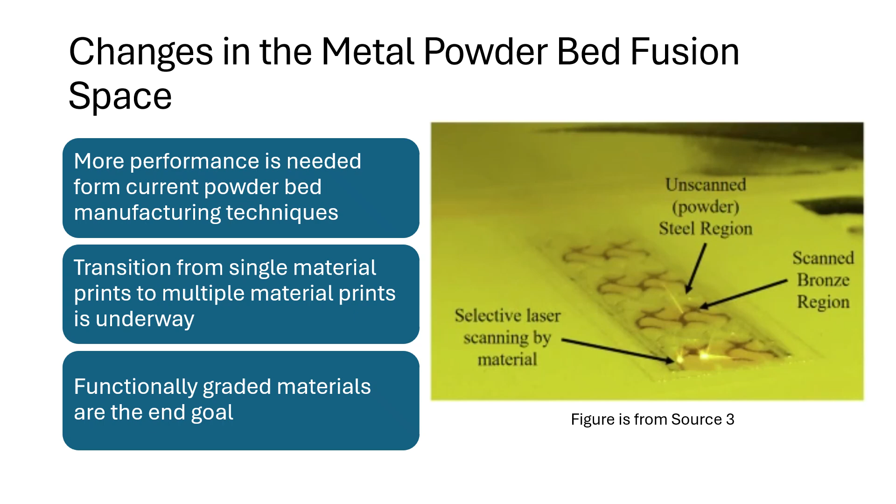The motivation to take on this topic is straightforward. Many aerospace and thermal systems require materials with contradicting properties: high thermal or electrical conductivity in one region and high strength in another. With traditional manufacturing methods, these differences mean that two parts need to be made and then in some way joined. Multi-material powder bed fusion lets us transition between these properties seamlessly. For instance, in a rocket nozzle, we can integrate a copper alloy for heat transfer near the throat and a nickel or steel-based alloy for structural reliability along the outside of the throat area.

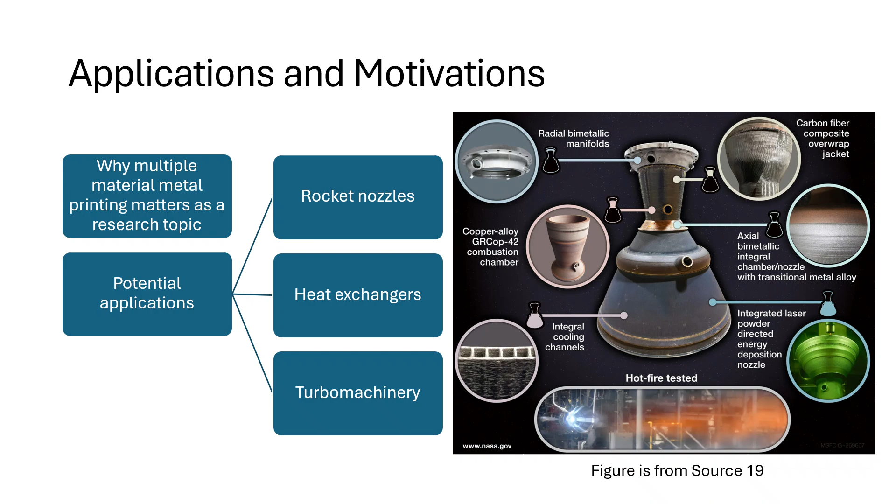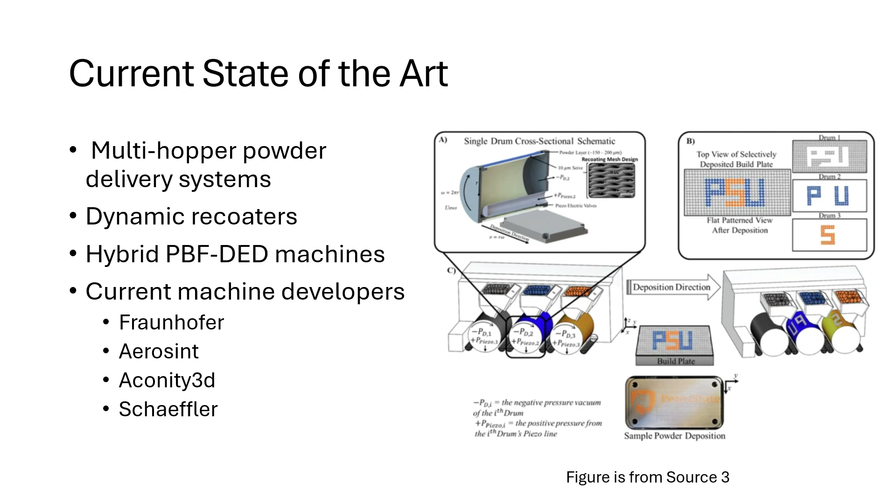The current research focuses heavily on hardware and process control. Fraunhofer, a printer and powder supplier based in Germany, is experimenting with dual hopper real-time recoating systems. Aconity3d is also offering very similar capabilities to Fraunhofer, and hybrid setups are emerging that merge powder bed fusion's precision with directed energy deposition speed, which is ideal for functionally graded transitions. Schaeffler and Aerosint are currently market leaders in this space with a recoater that handles up to 3 different materials. These advances help to move the technology closer to full commercial adoption.

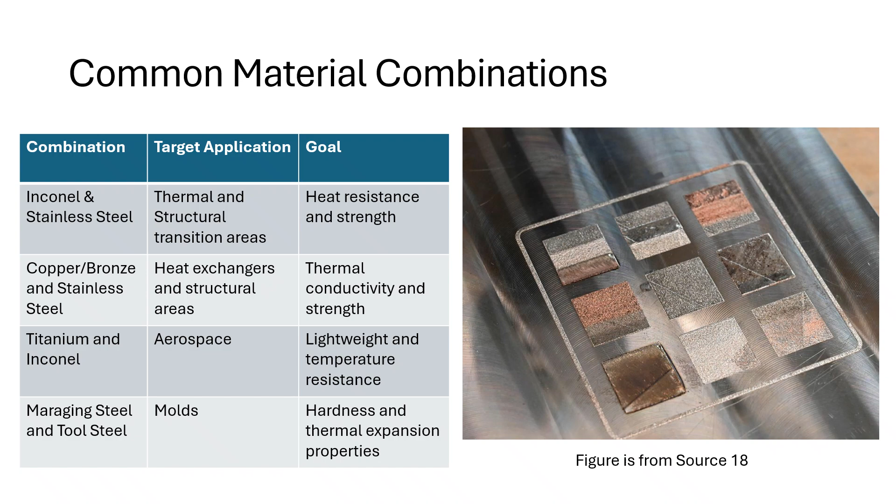Several combinations have already shown promise. Inconel and steel blends are useful for high temperature and high stress environments, while copper or bronze and steel alloys combine their best attributes of conductivity and strength. Titanium and Inconel combinations give lightweight yet heat-resistant parts. Each pairing targets a specific balance between mechanical, thermal, and electrical properties while also opening up new possibilities for designers to take full advantage of.

While progress is rapid, several barriers remain. Powder cross-contamination can cause unintended gradients. Dissimilar metals solidify in different manners, forming brittle intermetallics or high residual stresses. Thermal management during the print must also account for reflectivity and conductivity variations between the different gradations. Finally, there's little standardization for what the qualification framework should look like for these materials, which hinders industry adoption and makes designers more hesitant to use this technology for new products.

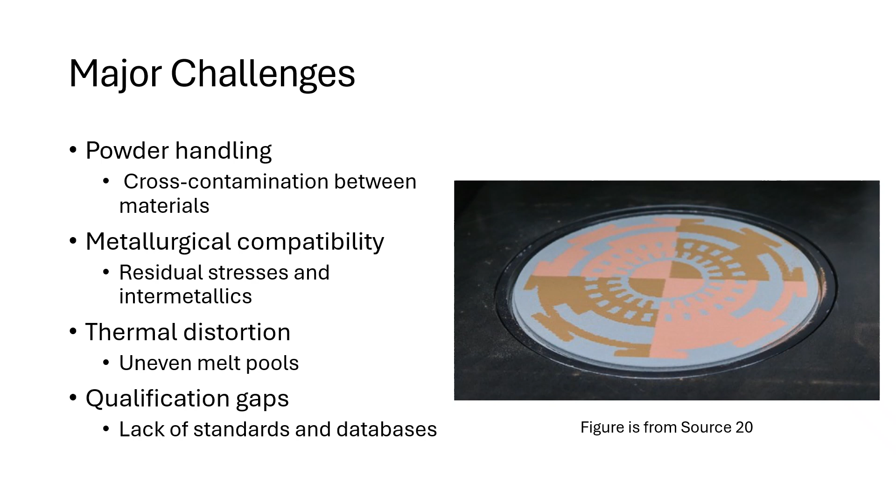Modeling and monitoring are essential for repeatability, speed, and reducing scrap material. Tools like ANSYS Additive Suite simulate the melt pool and powder interactions, and can be used to make informed decisions regarding the implementation of processes for the manufacturing of the part. In-process sensors, like pyrometers, cameras, and spectrometers, allow real-time feedback on melt pool stability and interfacial bonding, which is critical for successful multi-material transitions in printed parts.

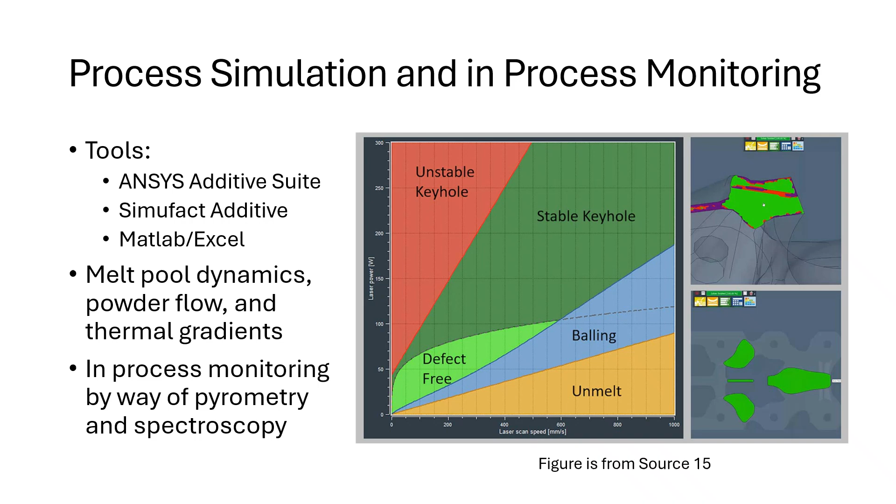Because of previous work I've done, of particular interest to me is the combination of copper and 316 stainless steel, and getting to understand how these two materials behave when used together in this process. My objectives are to characterize the interface between copper and 316, optimize processing parameters, and validate these results through both testing and modeling. Ultimately, I want to contribute to a data-driven system that ties process inputs together with structural and mechanical outcomes.

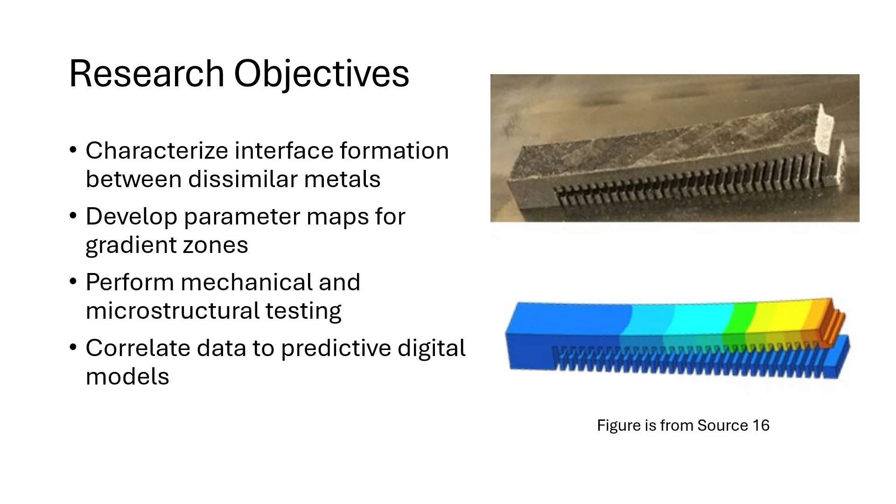As I mentioned earlier, I'll focus on the copper and 316 combination for its balance of conductivity and strength and its interesting applications for both thermal and electrical conductivity. I will use the Additive Suite tool that ANSYS offers, where I will characterize the prints and mechanical properties of my intended coupons in simulation. Then, using a dual hopper commercial laser powder bed fusion system, I'll print gradient transition coupons for several different types of mechanical testing, incorporating in-process monitoring to relate melt pool data to resulting microstructures in the metals.

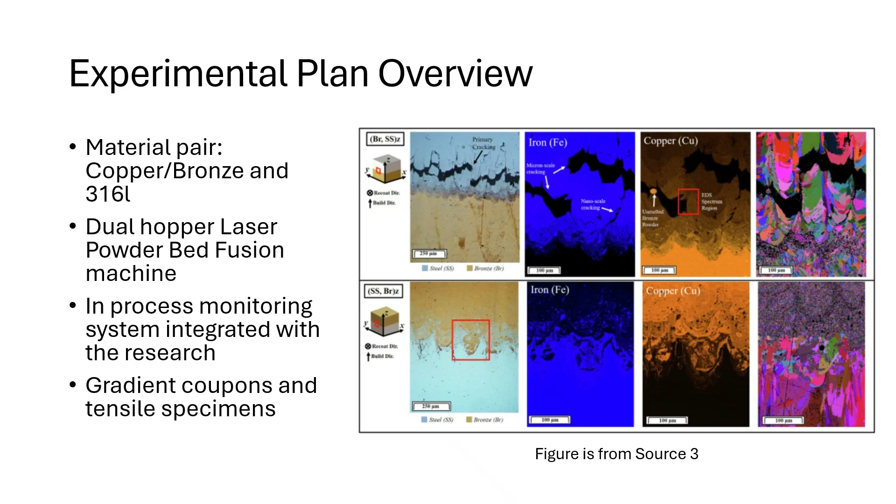After fabrication, parts will undergo hot isostatic pressing and heat treatment. Hot isostatic pressing is a post-processing method that uses high heat and pressure to densify 3D printed parts and close voids within them. I'll use scanning electron microscopes and energy dispersive spectroscopy for coupon composition mapping. Electron backscatter diffraction and transmission electron microscopy will be used for analyzing the parts' microstructures.

Tensile tests following ASTM E8 and E21 will be used for determining the mechanical strength of the different prints. These ASTM standards cover both tensile testing at room temperature and elevated temperature, which are where these materials are most likely to see their most severe use cases. Hardness will be covered with micro-hardness testing following ASTM E384. This standard is specifically written for hardness over short distances, which will be useful for capturing how the material changes as the mix of powders changes.

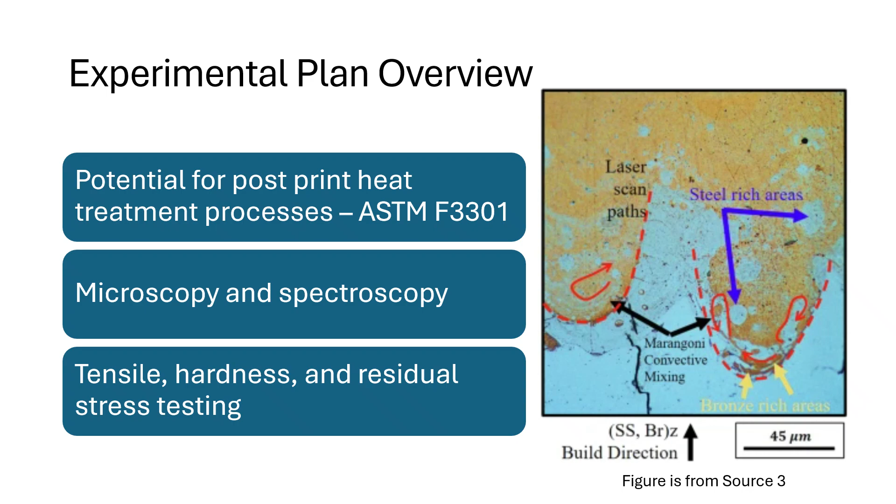To get interfacial integrity, I will use 3D X-ray computed tomography and a focused ion beam method to cross-section the printed parts for analysis. Finally, I will benchmark the residual stresses by following ASTM E837. This standard is also an area where my research can be helpful for pushing our knowledge. This ASTM standard was not written specifically for 3D printed materials, and currently, no standard exists. This research could help contribute to the creation of a residual stress testing standard for metal 3D printed materials. Altogether, these tests will provide a comprehensive understanding of how powder gradation choices shape performance, and may even help usher along the introduction of new engineering standards to help engineers make informed design decisions.

The final phase integrates all data. I correlate melt pool signatures with microstructural outcomes and quantify diffusion zone thicknesses. This dataset will support predictive modeling and could potentially be fed into a machine learning algorithm to help automate process control and help guide manufacturers to the best process for their intended outcomes.

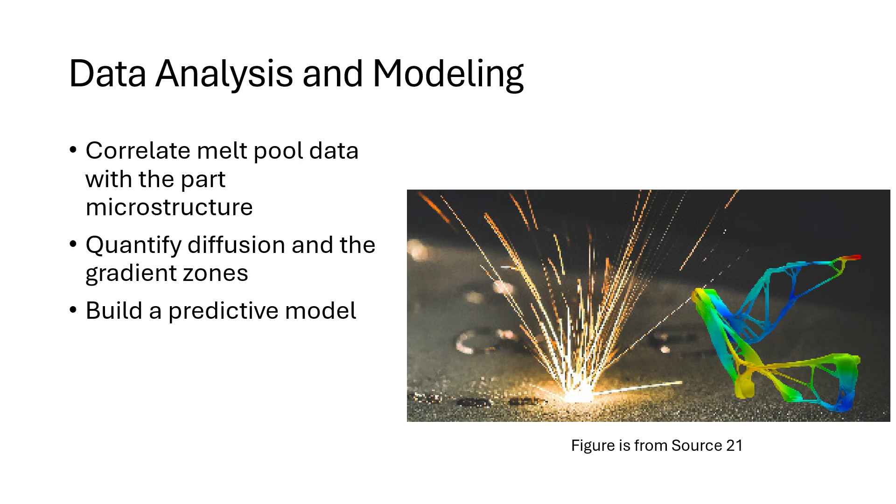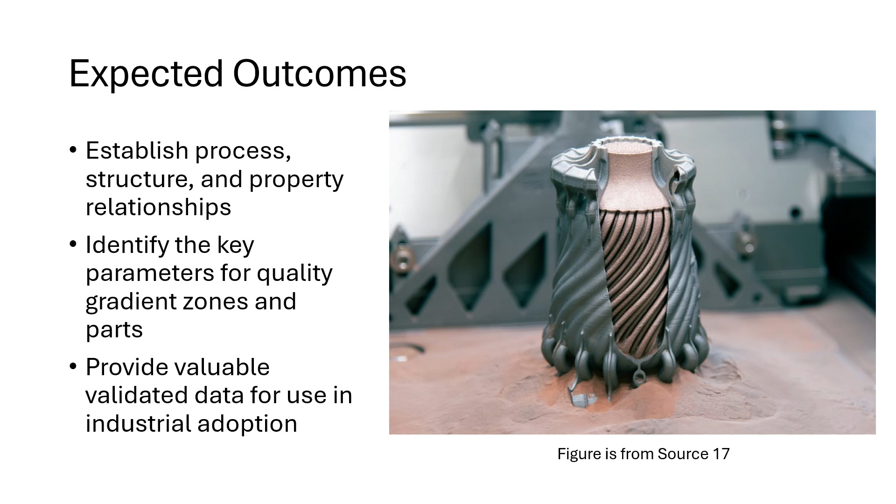For my end goal deliverables, I want to have an established process with well-defined structure and property relationships. I want to have identified the key process parameters, and finally, I want the knowledge that I gained from this experience to help push technology forward. To close, multi-material powder bed fusion is a breakthrough in additive manufacturing, enabling tailored performance within a single part. My research targets gradient control and qualification methods to overcome current barriers and bring this technology closer to industrial adoption.